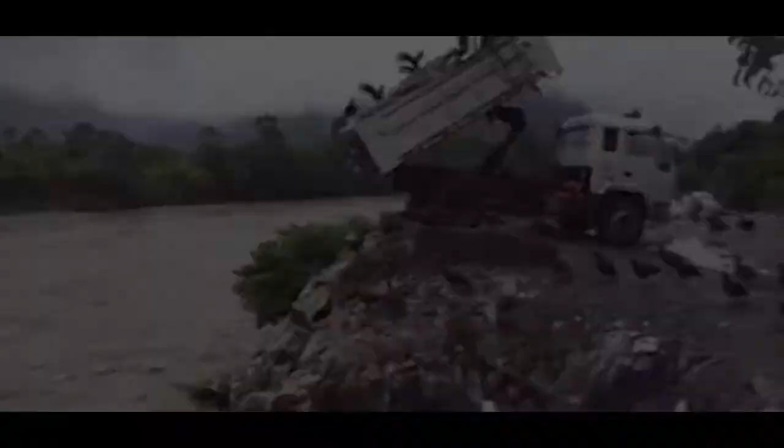Humanity has been breaking the walls that have caused limitations in themselves. Sometimes they forget that they are also part of the world. In this context, the never-ending problem of trash, especially in watersheds, is the wall which many people have been trying to solve. One concrete way to solve this problem is through innovation and research. But how bad is this problem?

Think of this scenario. Suppose a person is dumping trash into the river. The trash will be drifted along with the flow to the downstream. There are a lot of possibilities here. One is the trash is successfully captured by a trash screening apparatus in the form of a trash rack. However, the trash can accumulate and create trash buildup and eventually block the river flow.

The other is the trash can continuously be drifted along the river to the estuary and finally to the beach or the oceans, or instead to the small channels. Both possibilities can create other problems such as flooding and unstable irrigation supply.

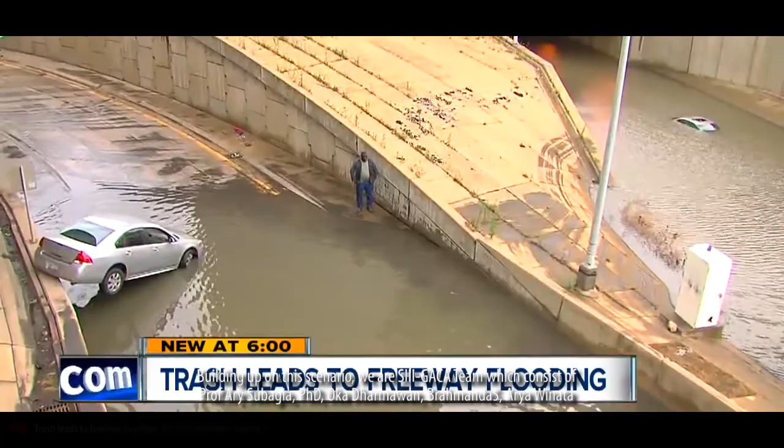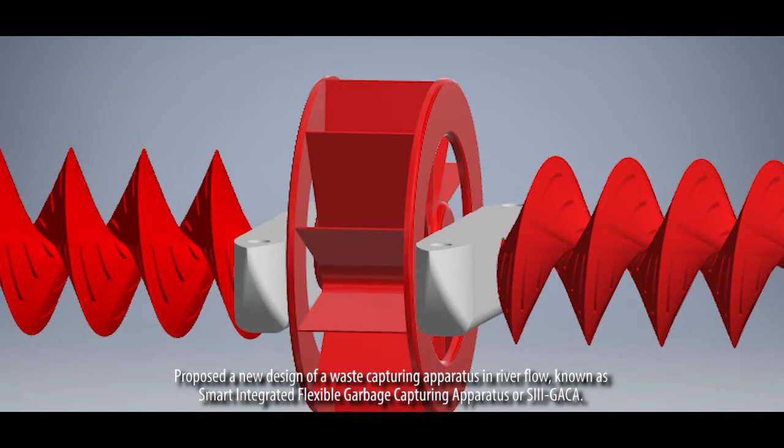Building on this scenario, our SIII-GACA team, which consists of Prof. Ary Subagia PhD, Oka Dharmawan, Brahmandas, and Arya Winata, proposed a new design of a waste capturing apparatus in river flow, known as Smart Integrated Flexible Garbage Capturing Apparatus, or SIII-GACA.

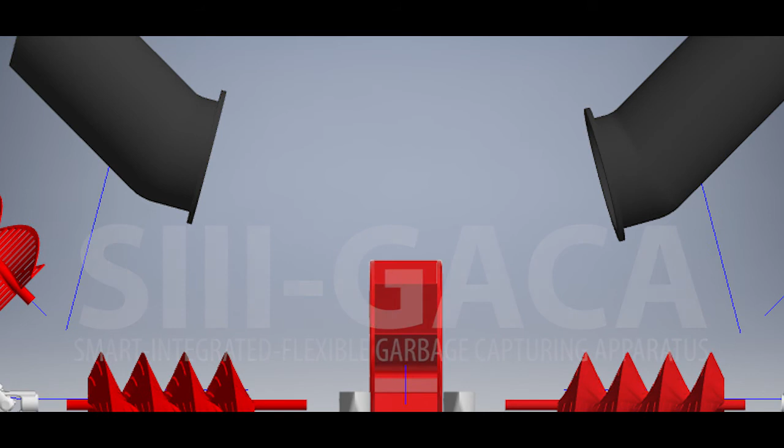This apparatus consists of a waterwheel as a rotation generator, the modified design of screw conveyors in horizontal positions used for capturing and transferring the trash, inclined screw conveyors modified with the design of an array of bars which is used for passing on the trash to the containers, and the flexible joints.

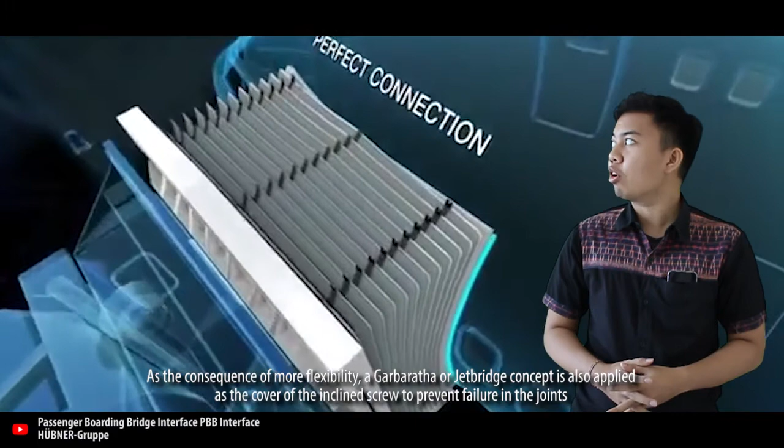In this design, we also implement the floating mechanism in order to make the apparatus more flexible and adaptable to the fluctuating flow of the river. This is inspired by the floating mechanism in floodplains. As a consequence of more flexibility, a Garbaratha or jet bridge concept is also applied as the cover of the inclined screw in order to prevent failure in the joints.

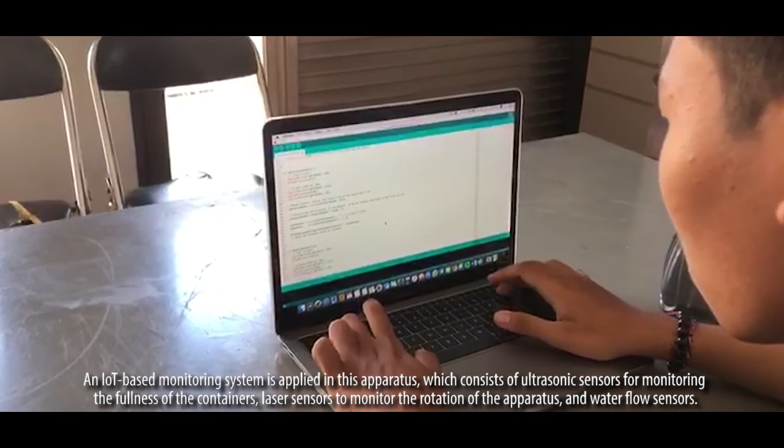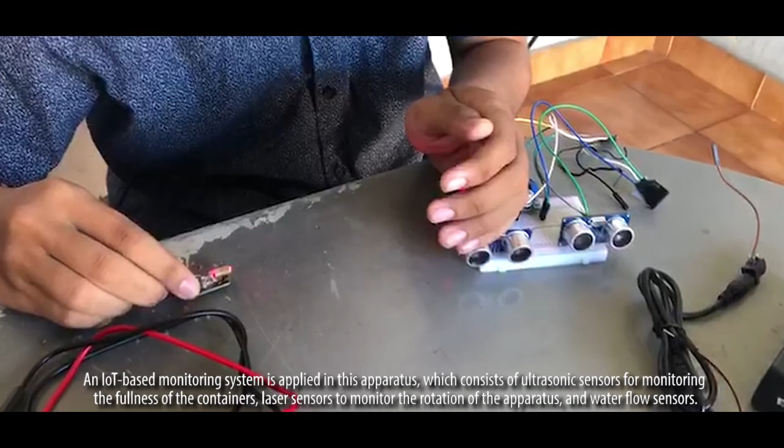An IoT-based monitoring system is applied in this apparatus, which consists of ultrasonic sensors for monitoring the fullness of the containers, laser sensors to monitor the rotation of the apparatus, and water flow sensors. The whole data is processed and transmitted by NodeMCU to Google Firebase as the data platform. This monitoring system will increase the work efficiency of the maintenance worker as it is accessible in real time.

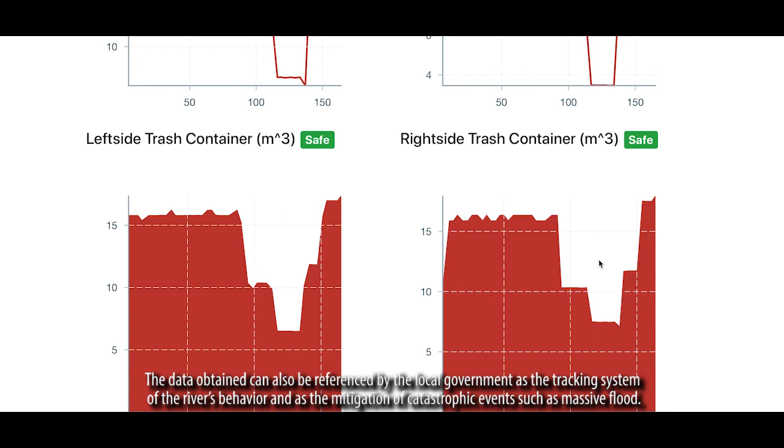The data obtained can also be referenced by the local government as the tracking system of the river's behavior and for the mitigation of catastrophic events such as massive floods.

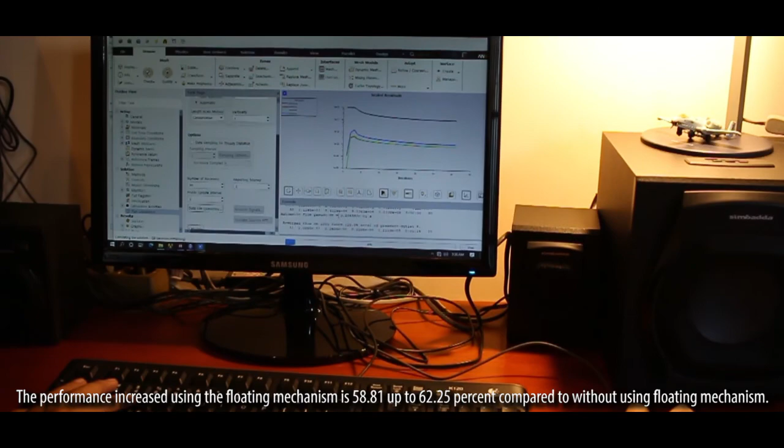We've conducted several tests for the design of this apparatus. In the simulation test using computational fluid dynamics methods, ranging from 0.53 to 1.34 meters per second speed of river flow, the performance increase using the floating mechanism is 58.81 up to 62.25% compared to without using the floating mechanism.

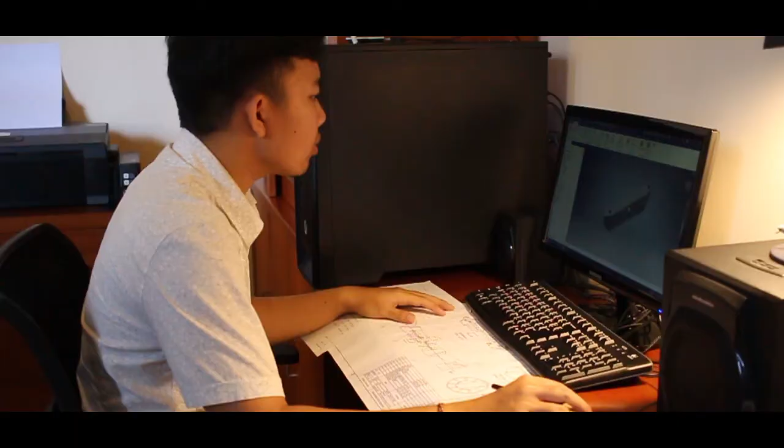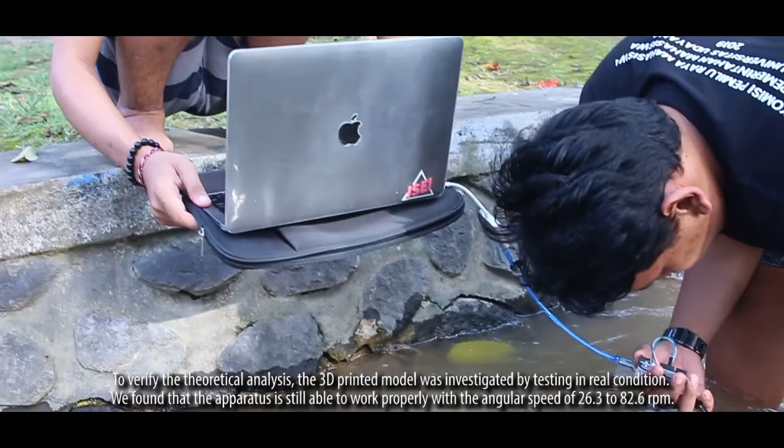We've also done some calculations on the buoyant force acting on the apparatus, and found that with the design of the floating support, the buoyant force increased 36.1% and theoretically confirmed that the apparatus will float. To verify the theoretical analysis, the 3D printed model was investigated by testing in real conditions. We found that the apparatus is still able to work properly with angular speed of 26.3 to 82.6 rpm.

As we are also part of the world, ending this problem will not be achieved just by creating an apparatus or doing research, but with our contributions by limiting trash generated and also stopping littering into the river flow, we surely will.